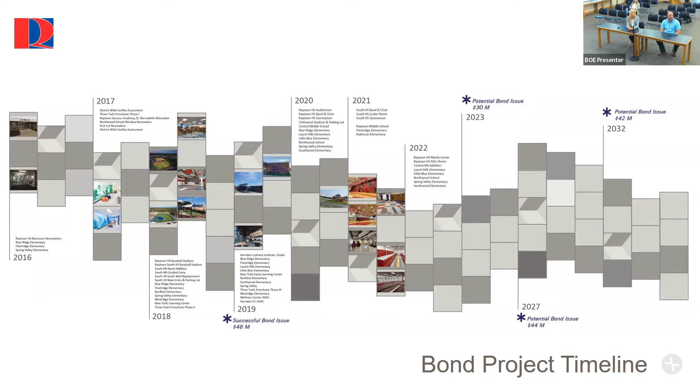So as we prepare for that 2023 bond, these are the last prices that were shared with this board for estimates on your 2 locations for the possible projects that you approved us to move forward with last month. So the South High School Performing Arts Center and Auxiliary Gym is currently estimated. These are all in costs. These are not just construction. This is including permitting fees, soil tests, design fees. There's furniture and equipment included in these costs as well. This is an all-in number at $23,239,035.

As you all know, markets right now are still very high. We're hoping to see some stabilization in the next year or so, but it's still pretty up in the air when that stabilization will happen. They're currently looking at the projects and applying new numbers to them to see if these are still accurate based on when these were developed last year. Okay. Next slide. Any questions on any of that before I move forward?

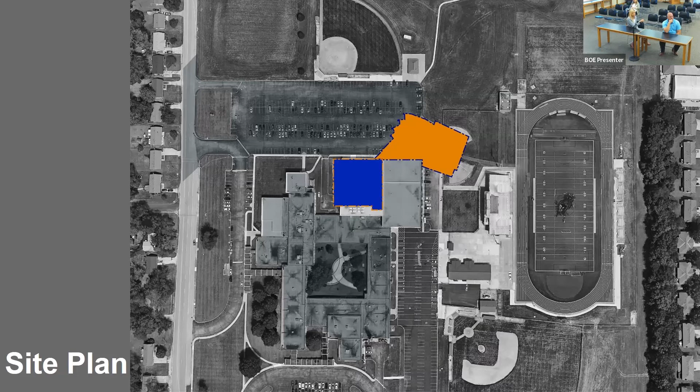It worked. Okay, so just a little bit of a close-up view of this. So this is that orange shape that I was just showing to you. What you're seeing here is a new auditorium located here. Stage is on this side to the back. We have storage and stagecraft areas even further back from that.

To the front is a new main secure entry, entering into a pre-function space to be able to support that auditorium. And as you enter into the auditorium, side access here or front access here, this is all one level floor. And what you're seeing here is seating to the back, and then this is sloped for seating to the front. The benefit on this design as we work through this is that there's a flat portion to the back here that has a movable partition that drops down.

And this allows the school to be able to use both spaces simultaneously, allowing this to be a multi-function performing arts center, meaning that there can be practice happening back here for cheerleading while there's theater practice happening up here. This is an acoustical partition to allow sound to hopefully be trapped in between those spaces. So you're getting maximum function out of this square footage. The other benefit to that is the seating telescopes all the way back against this wall to really open up this entire space.

Added as part of the addition is a concession stand here, new mechanical spaces, dressing rooms and makeup, new restrooms located here, and an additional classroom to the backside that'll be completely adjacent to that stagecraft to allow the theater department to be able to hold class and be able to travel back and forth between the two spaces. The main gymnasium is here.

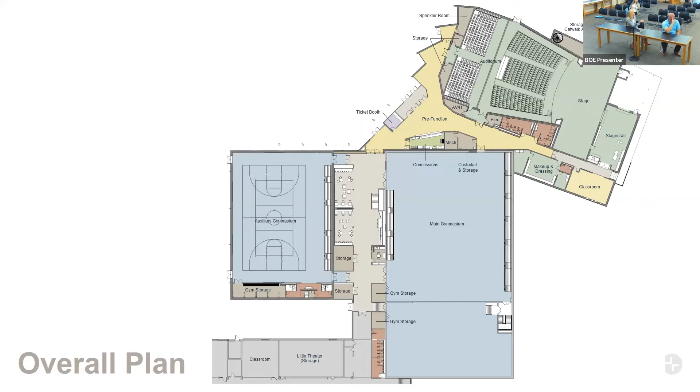As you enter into the auxiliary gym, as you can see here, there's storage and restrooms and a brand new court space. So blowing this up here, you can see a little bit clearer what's happening in the auditorium as far as 2 completely usable spaces independently. There's also storage worked in where we could get it. There's some odd spaces here with this type of configuration, but we were able to squeak in extra storage wherever we can.

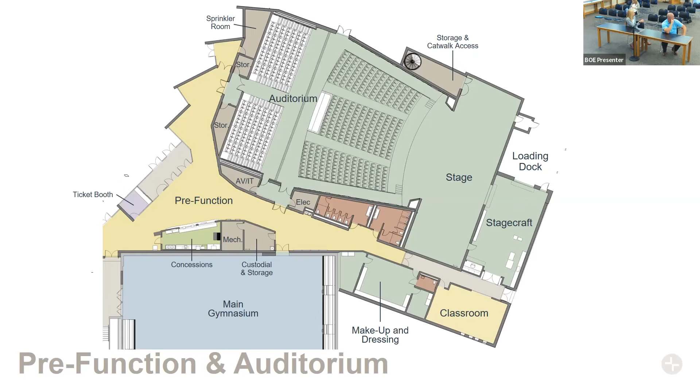There's even space here adjacent to the stage for the grand piano to be able to be tucked back and hidden when it's not in use. Makeup and dressing adjacent here, and then still access to the main gymnasium off of that new pre-function. Skip here. Gymnasium.

Currently, the load for spectators in this gymnasium is 250. So the intent here is that games can be held in this gymnasium with spectators for JV and varsity as scheduling is allowed. This is an ICC 500 storm shelter, which we are planning to put in applications for FEMA funding if it's granted, which will help with cost of the project. We won't know for a while if the state will grant that to you, but we are going to put in applications for it.

What do we think the amount might possibly be for it to be granted? Okay, we're not real confident we're going to get anything out of that. They've applied for, when I say they, Hollis and Miller's applied for FEMA funds on many jobs. They've not granted that very often. So it just really depends.

And then the last time that it was granted, your name gets added to a list. Just because they're saying, yes, we're going to fund it, they don't know when it's going to get funded. So throughout our discussions, we talked about it being important that if we get FEMA funds, that's a bonus to be able to do that, but we need to plan to not have FEMA funds through the planning process and construction process.

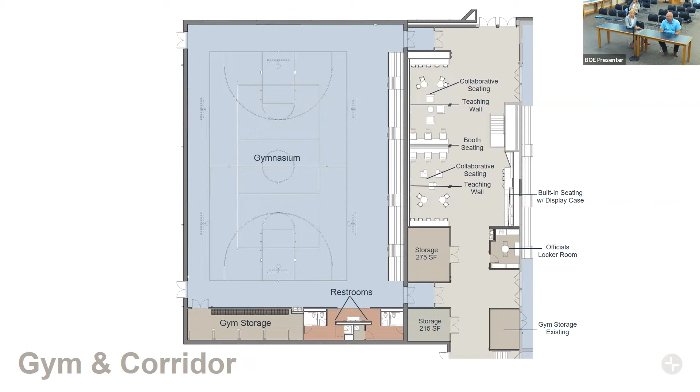So you're saying they could build it and fund it, pay for it, and they could give us a grant maybe a couple of years even after the project's all done. Correct. Okay, so we're going to bounce into some images. Any questions on the plan before I move forward?

So because we did finish and complete design on this project, we do have full renderings of what it will essentially look like when it's completed. So what you're seeing here is if you're standing in the middle of that north parking lot looking southeast towards the new addition. So this is that new secure entry as you would walk in here, 2 double doors. There's an awning that drops over that to allow queuing for students if there's any weather, and it stretches around here. This is the auxiliary gym on this side, and this is the Performing Arts Center on this side.

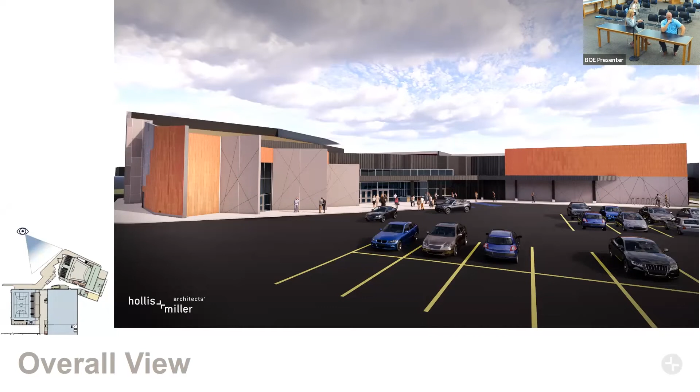This is the view as you move further to the north. And this is the view of the new auxiliary gym on the west side. And then these are some images from the interior. So as you enter through that new secure entry, we do have a double height space in there to allow light. This is a little bit of an uptick in scale as far as finish level, allowing as you come for performances and theater productions, feeling a little bit of a sense of it being a theater type of approach.

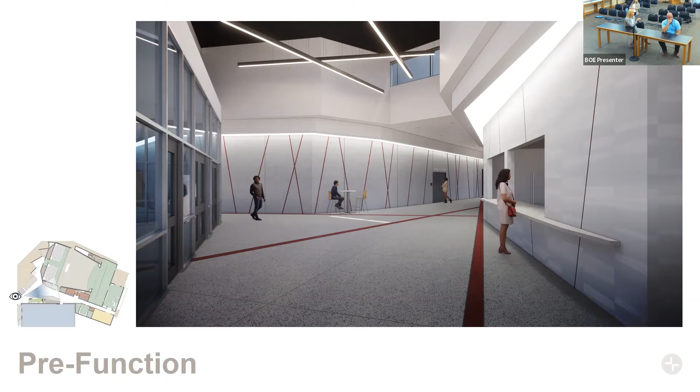And so we've got polished concrete floors here with stains. This is just a stain here that runs through it that starts to pick up some of the patterning on the exterior that's brought to the interior. A small clerestory window here allows natural light to come down into this space. Concession stand on this side, and then entry into the auditorium beyond here. This is a view of that entry from the other perspective, if you were standing in the hallway, the pre-function. To the left around this corner is where you would access the new corridor and the auxiliary gym beyond.

What is the capacity of the pre-function area? I mean, it matters in that we need to make sure that people can come in, but the idea here was at Raytown South currently, there is a pre-function space there, but it's not big enough. And so we did size this up from what they currently have to allow more people to be able to come inside and be inside the space while they're waiting to go into the auditorium. I can find that exact number for you if you'd like.

And when it comes to security, there's not like a station in the pre-function area for security? There is actually, yes. So on this image right here, if you see this door that's right there, this small area right here is actually designed for the SRO officer to sit. It's also a ticket booth so that tickets can be sold as people come in that double vestibule, pick up their tickets here and come on in. So that is dual function, not only for the auditorium, but also for the gym.

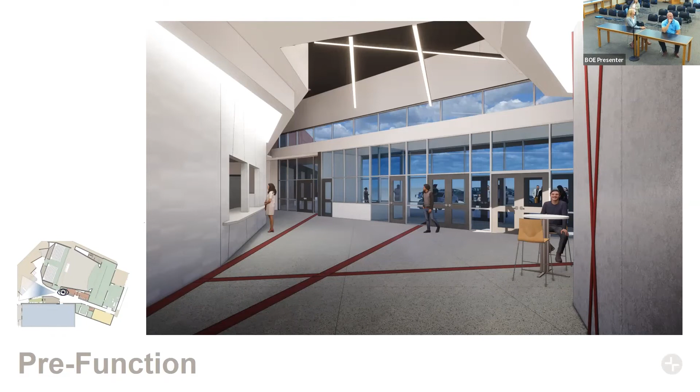So this is a view as you enter into the auditorium. You can see that sloped floor reaching away from you and going down to the stage level. This is modern in that it's a zero entry floor level, meaning it's ADA accessible as you enter in, and then there's railings here around both sides that are also at the same level of the stage all the way around each side. And so this is the only sloped portion as you come in.

The sound booth is right here in the center of the auditorium, which is the preferred area now in modern theater productions. Stage is here. And then there's acoustical clouds floated here for sound. And then there's a catwalk above to be able to access lights and speakers.

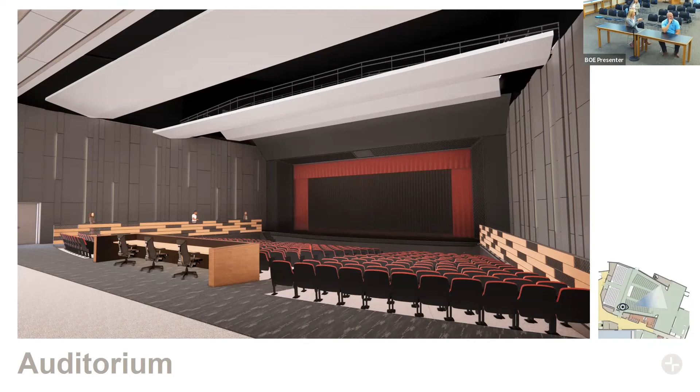This is a view of that telescoping seating to the rear. So this will all push back to this wall to allow this to all be open space. Currently, this is a concrete floor. And then this is that partition that I mentioned earlier that will drop down right here and be able to separate the two spaces. So that backside's concrete flooring? Yes.

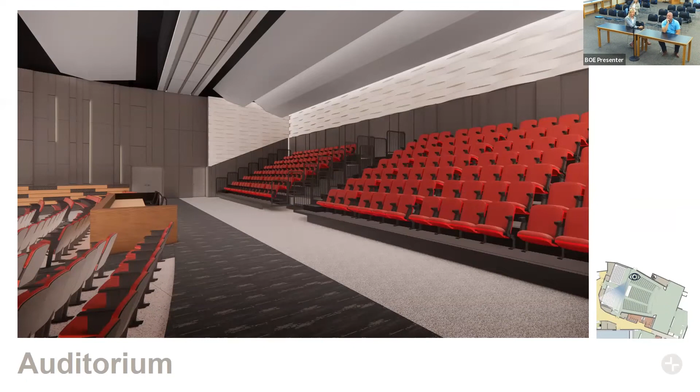And then as you move into that new corridor that we're rebuilding in between the main gym and the new auxiliary gym, this is essentially what you'll see. That's the current stairwell that goes down to the locker room. We'll be maintaining that, not moving it or changing it, just updating and probably painting it out. Opportunity for new school pride to be installed throughout the school, just start showing a hint of it here. Updating the trophy cabinets down here and working in seating opportunities as well as different types of storage.

And then on the right here, you can see just a suggestion of what those collaboration spaces could be outside of those two gym environments, putting screens on the wall, marker boards, different types of seating in between each space.

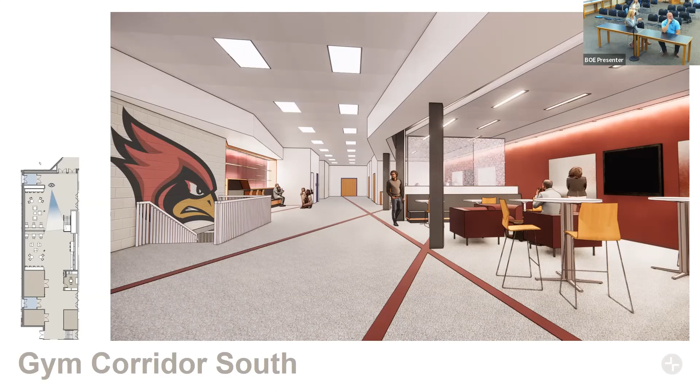And then this is an interior view of what the auxiliary gym could look like. Again, it's got that movable seating that can be moved in and out to allow plenty of space. We have batting cages, basketball, as well as volleyball if needed, wall pads, and then some environmental graphics as well.

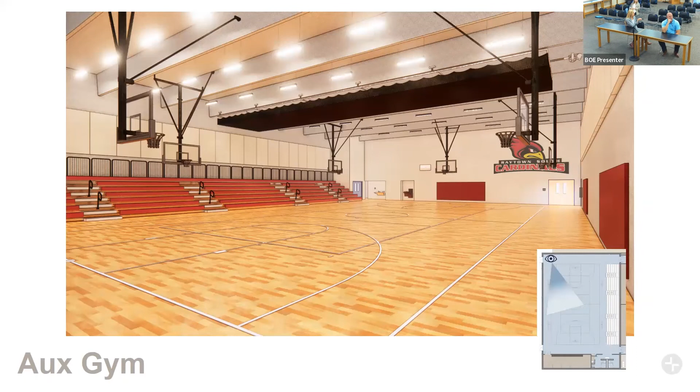Do you know, does Raytown High have batting cages right now? They don't, do they? They do in the auxiliary gym. Do they? In the current one. Any questions on Raytown South?

Question, please. And I know that we did these designs and you've kept them very up to date and forward looking. One thing that is very popular with high school students is gaming. E-gaming. Oh, so glad you brought that up. Thank you. See, I knew you were forward thinking. Yeah, so some of our previous, and Mr. Moore may be able to comment on this too. He was part of the design discussions with the committee that was put together at the school.

So as we worked through those designs, we had students, teachers, staff, theater directors, even some parents that sat in there. And Mr. Moore was there as well to help us work through what needed to be included in these designs. And one of the things that did come up was e-gaming. And so because we weren't sure how e-gaming was going to be supported by Raytown in the future, what is worked into the current drawings right now is basically the backbone to be able to support that programming. So wiring, outlets, hookups for future screens and stations on the stage or in the audience as needed.

So currently in the price, we don't have the equipment worked in because we weren't sure what would be needed, but there is the wiring and the outlets to be able to plug it in. And I think we installed that basis at Raytown Heights. Did we install that for the future? For possible Raytown High School's auditorium use? No, we did not. When we did the renovation, we didn't do any more. No, year before last.

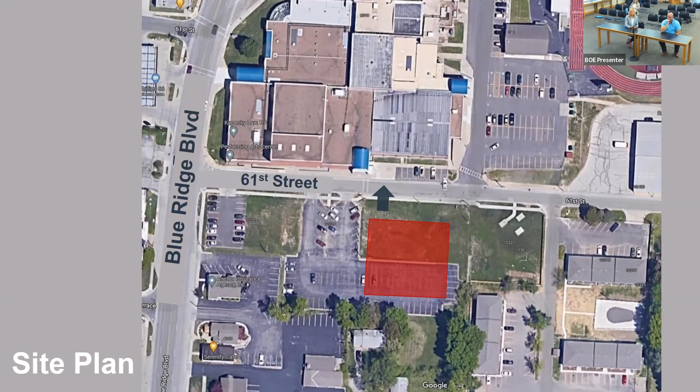And then I think the other thing we want to share, this is updated slightly from the handout that you all received last week. We had a great meeting late last week with Newkirk and Novak to start talking about scheduling and phasing for these projects. And so that's what has updated essentially. The rest is the same: at the top, you'll see design progress and documentation. We're starting now. We're going to work through the planning and the design for Raytown High School, as well as review the code compliance and some of the design items that worked into South High, just to make sure those are still hitting the mark.

Working on bond planning. Thank you, Ms. Payton, for bringing that up. CAC meetings, election committee formation, community bond survey, community messaging overall is kicking off at the first of next month and will stretch all the way through to April. And then construction and completion. So planning to bid prior to the bond passing so that it's shovel ready, contracts are in place and everything's ready to go as soon as that bond passes in April. And then essentially looking at a completion of May 2025 for everything. Newkirk is really taking a look at when they can procure materials, get in the ground, and get everything built as far as manpower. Right now, May of 2025 is when both projects will be completely finalized.

On your review of the South project, I don't want to slow anything down, but it's been a couple of years, so you've got several new staff, including a new principal. Of course, Shunton was on the team before, but you do have a new theater director. Are you going to just... So I actually had that conversation today. Okay. I went and talked to Shunton about what we're going to do with that. From a bricks and mortar standpoint, we're pretty locked on where we're at. We can move some things around. We can do some things with flow, graphics, paint colors, all those things. But it's drawn.